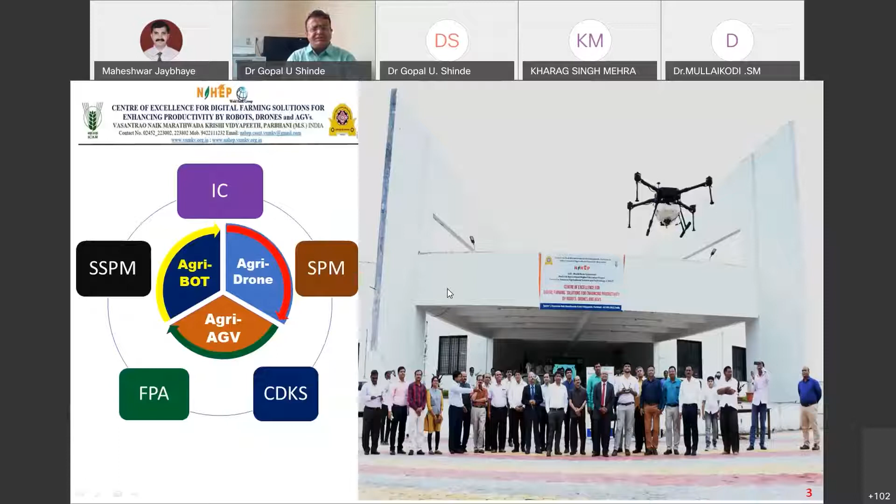So postgraduate students will develop new experiments with new solutions. This university holds land around 7,000 acres in Parbhani campus, and with the rest of the districts, the total entire campus becomes around 10,000 acres. So using these resources, we can go for making these practices within the center.

This center is called the DFSRDA Center. This DFSRDA Center holds this entire organizational structure where human resources are paying their services and doing activities to innovate new practices for digital farming solutions.

The traditional practices, earlier we used to go for animal power and before that manual labor. All those operations took too much time. Before the 19th century, these practices were very time consuming, and energy conservation was depending totally on human efforts and human energies.

But later, after the 19th century, from 1914 to around 2014, this developed phase was introducing different types of mechanical devices, and mechanization started there onwards. So the people and society who are working with these advanced technologies now are very much acquainted, and they are working with different devices as such.

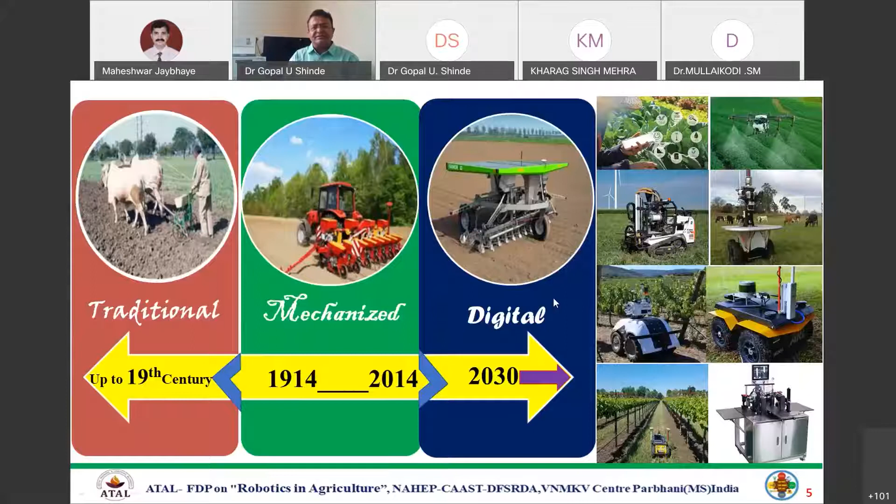Whatever we see, we must go to the new era or new venture, and that is agriculture with advanced technology. So agri-bot, agri-drones, agri-AGVs, these are the targeted devices. We know agriculture devices are basically robots working for agricultural purposes, to find comfort for the farmers and the exact cropping system and production cycle.

So we do the sowing. Before this, we do soil bed preparation, soil crop mapping, then sowing, interculture operation, then harvesting operation. Moreover, after harvesting, we go for post-harvesting operation, food production, and post-harvest production with good qualitative value-added products in food culture.

So these are the emerging applications, and we need to find the difficulty areas that attract operational time and operational effort for the farmers. So planting the seed, harvesting, or going with the environment and putting various kinds of data in the hands of the robot by mobile device.

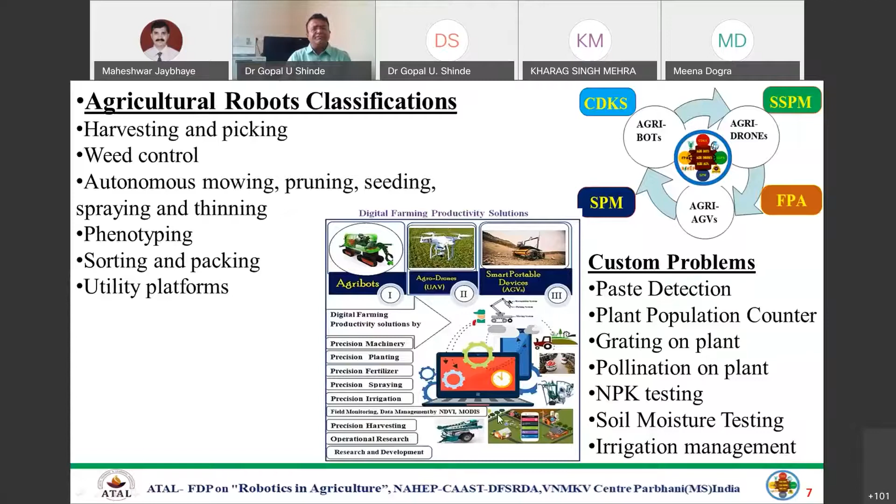So that's why I started practicing around 1999. At that time we were habituated to just attractively see how a robot looks like. So we started producing agricultural robots using scrap material, with toy-like operations that are nowadays available in the new toy market, like forward application, reverse application, left turn, right turn, up and down.

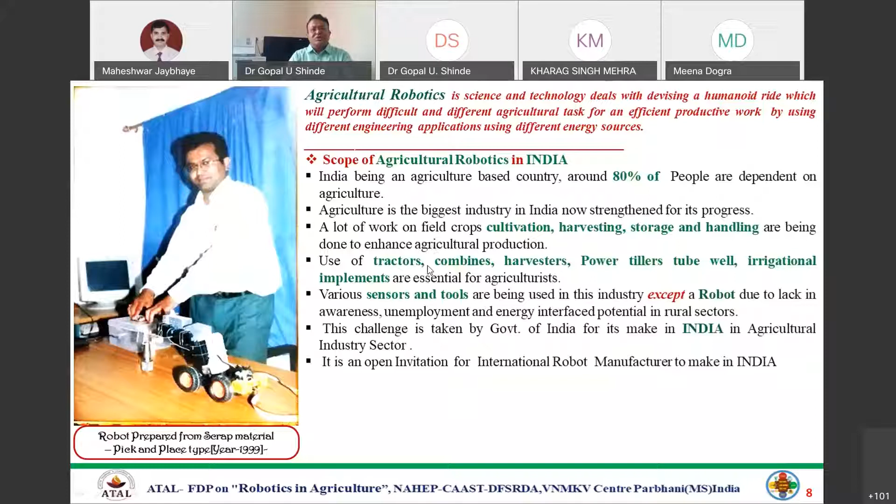These are the kinds of motions we are making by use of motors, joints, and the end effector, which performs operations using multi-degree of freedom. So different types of small automated devices and robotic applications were an attraction in the last decade, and now we started doing this for the Indian farming system, for Indian farming society, to attract it toward this new field.

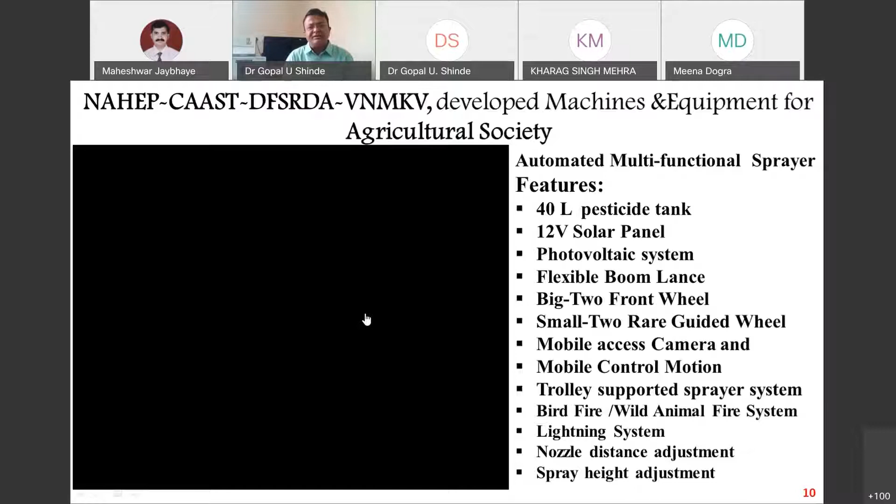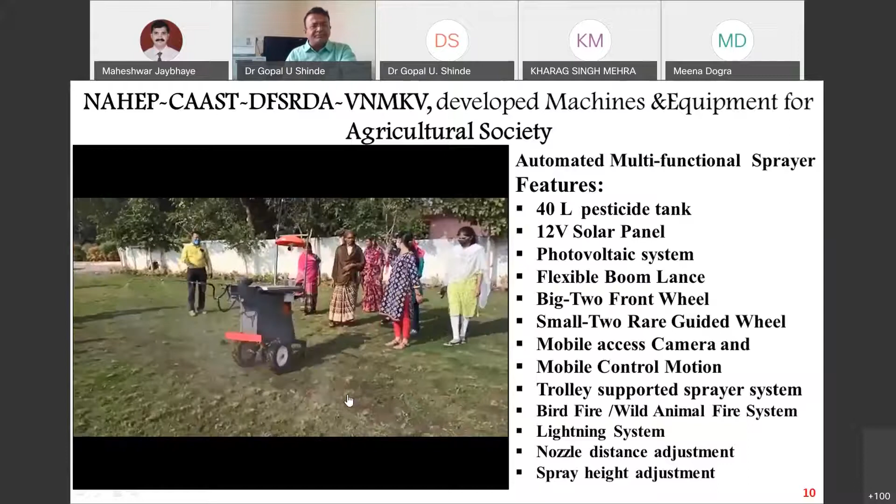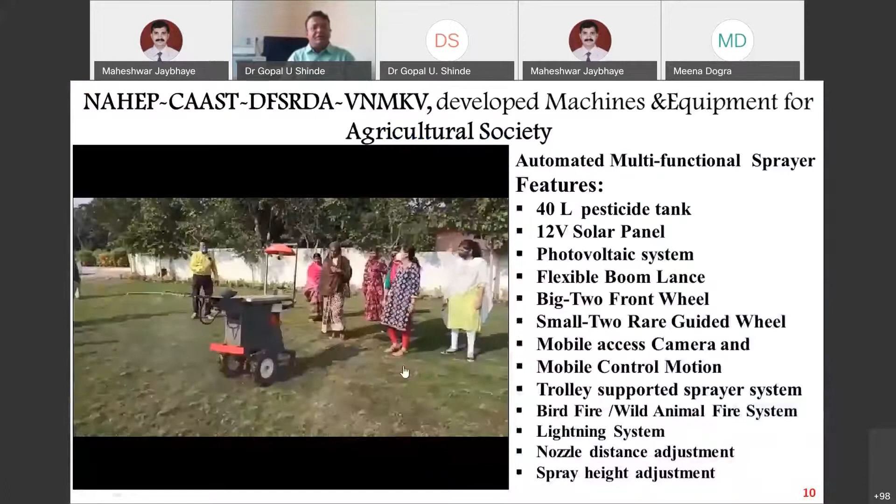We found one of the devices - we have developed many more devices - and I can show some of them on this platform. This operates on a self-activated program for a vegetable sprayer system, where a woman laborer or woman farmer can also operate it for different cropping systems.

Once you locate the GPS in the field, this sprayer has a 40-liter capacity pesticide tank, a 12-volt solar panel, and we are also using a battery for storage. The battery can operate for at least 1 hour.

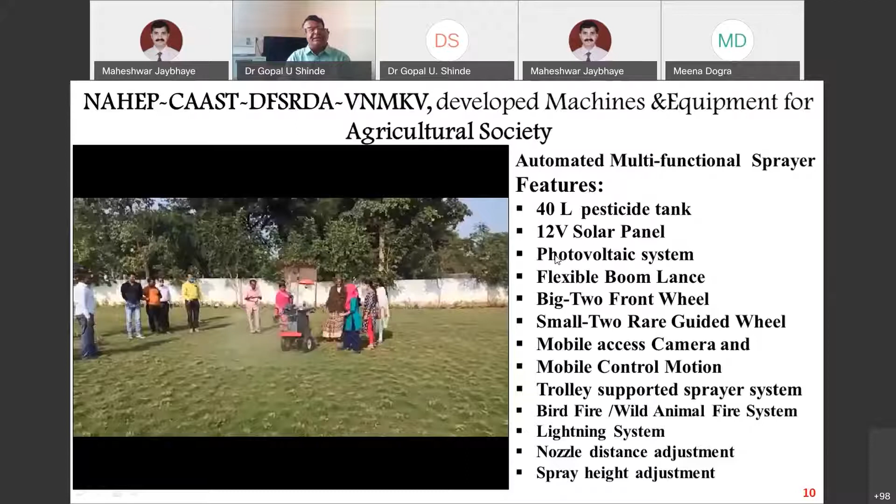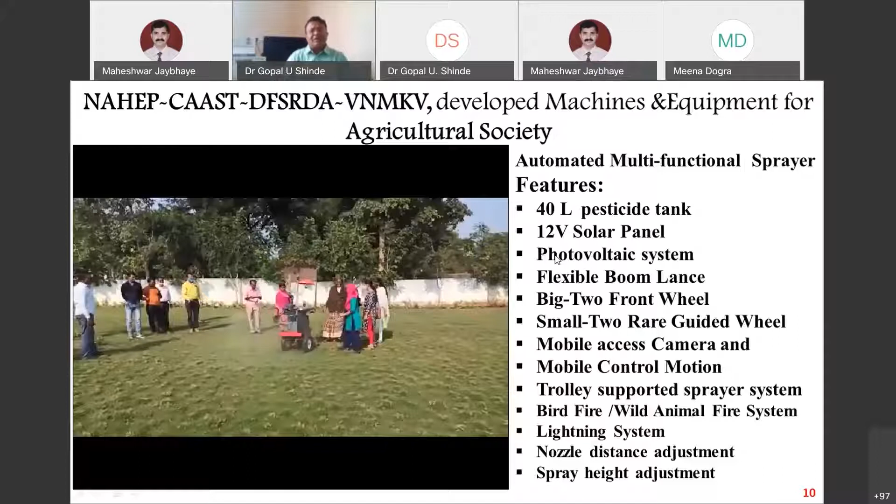We have a version with a flexible boom lance. The lance is nothing but a straight bar, or we can make it foldable. There are different types of nozzles we are mounting, and these nozzles can be adjusted at different distances so that in the row crop system, they suit a particular row crop by adjusting these nozzles.

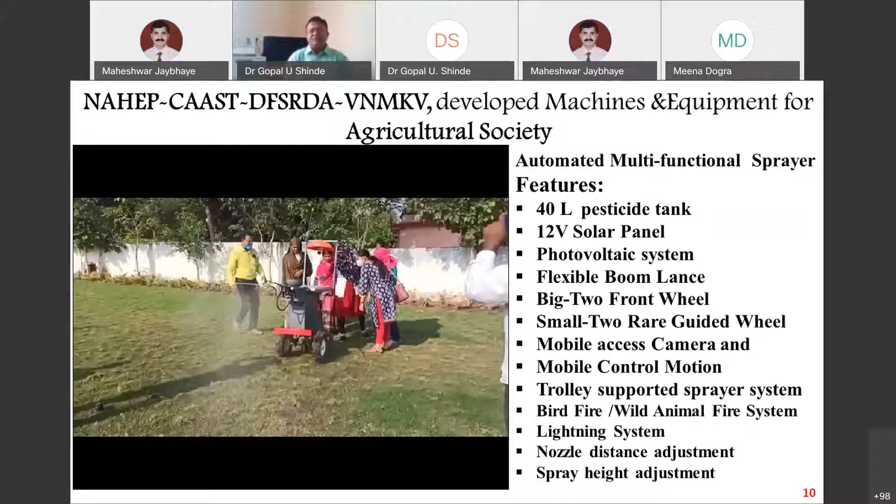It has big front wheels and small rear guiding wheels. We are using mobile access camera, and we can also control the motion on mobile. Earlier the operator used to carry it manually and certainly got fatigued after a few minutes of operation. So this comfort is now independently handled by the sprayer system.

This device creates a loud voice, and this loud voice scares the birds away - birds are not able to stay in the field because of it. There's also an electronic fire device. Electronic fire is also used in the field to prevent destruction of the crop at its early stage. Sometimes one needs to operate this device at night, in the evenings, using solar-charged batteries.

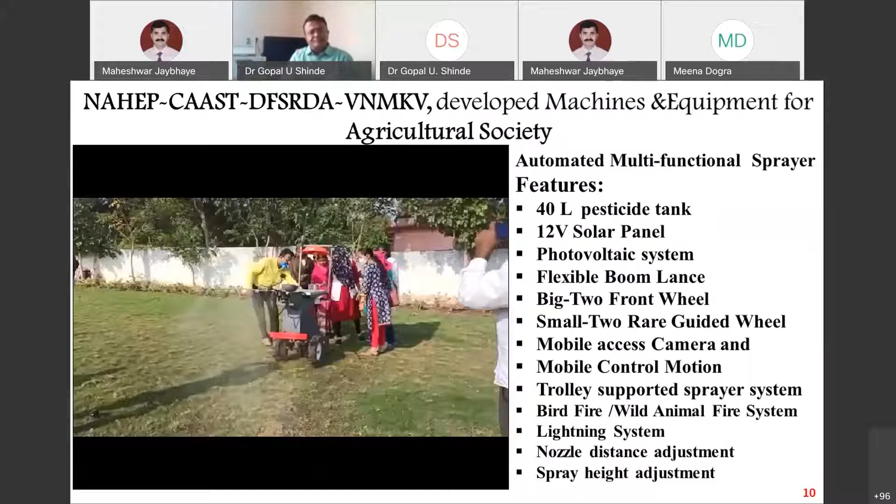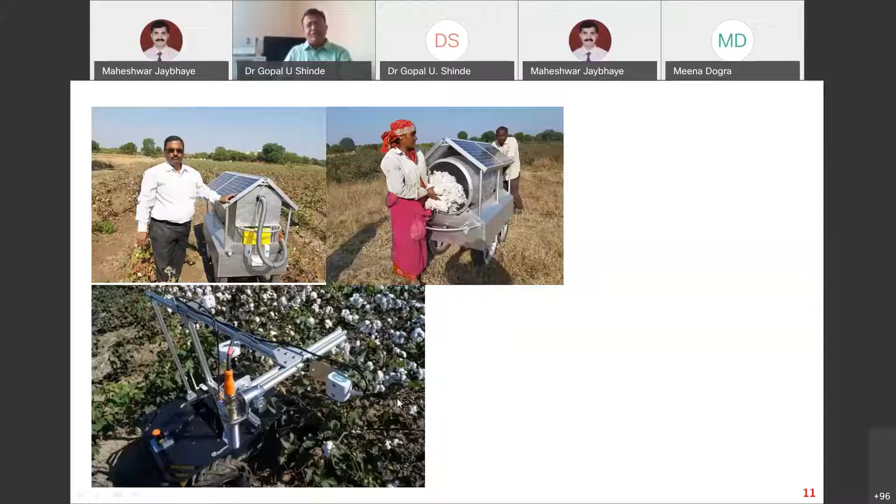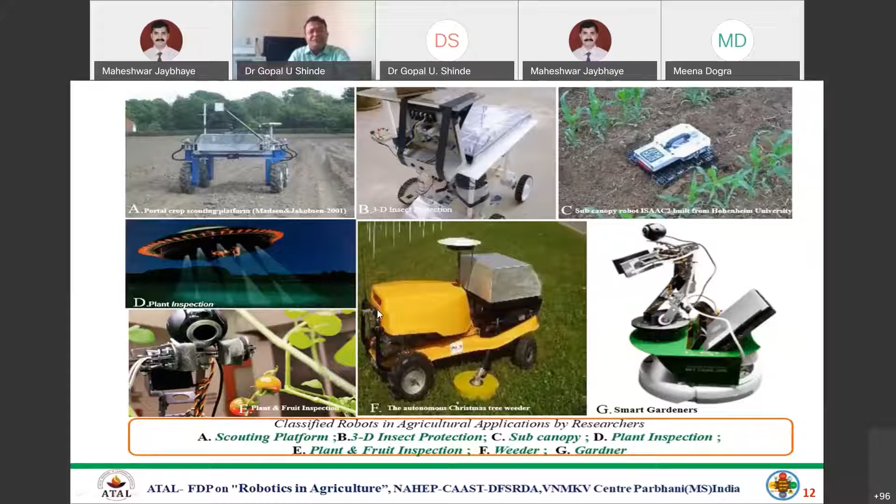There are different types of robot models in our plant. Sometimes it uses solar energy, voltaic energy. In the agriculture field, we like to make a sustainable device which can work on solar power.

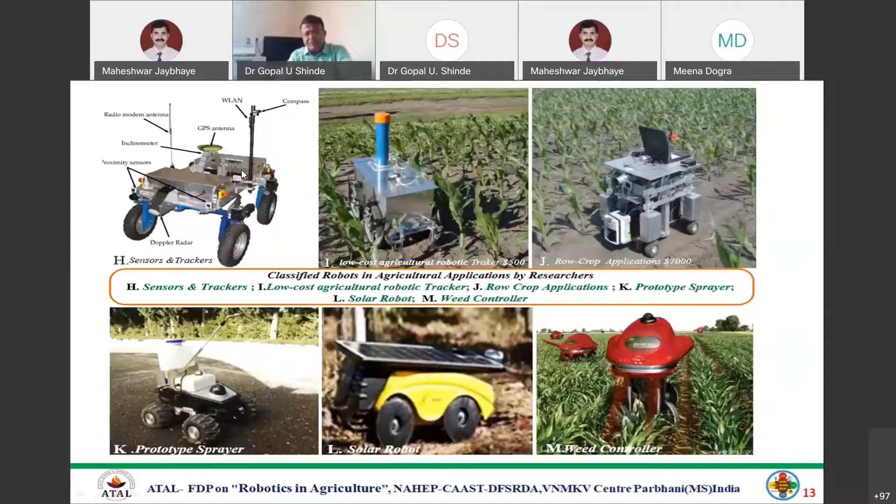So sensor applications using devices with physical contact or non-physical contact - we are also procuring different types of cameras. So now we are tying up our NAHEP center with Boston Dynamics. Boston Dynamics makes animal-like robots which can go and roam around the field to scout and gather information.

We are also associating with Ubiquiti. They've started working with us, and we have built up an MOA with them for doing certain custom application robots for indigenous cropping systems.

The various types of robots now take on the challenge of working below the soil surface. But if you look up to 30 centimeters into the soil, there is a lot of soil strata which we cannot see with naked eyes. When we apply the tool to interface with this below-soil surface, the force is indefinite, unpredictable. So for that unpredictable force, we need cultivators and rotavators which can go inside the soil surface and work for different kinds of soil bed preparation operations.

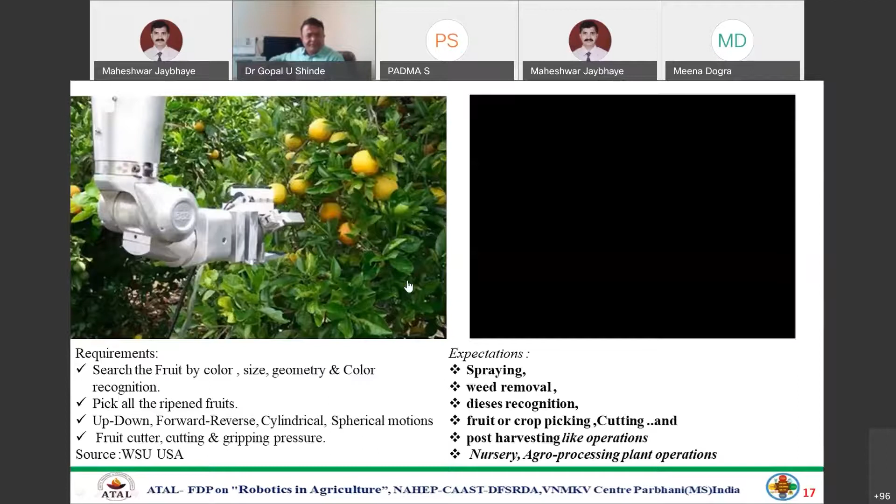Relating to plant counters and plant specifications, there are robots developed by different countries. I visited Spain for winery production - horticulture plants. They developed a robot for counting the vine plants, which is very important for them as a cash crop.

So for this, the types of systems can be built in. We will find that sometimes we need to apply herbicide, sometimes we need different kinds of soil tillage techniques, or different operations to cultivate these plant systems through their entire production cycle.

Regarding the winery in Spain, Universidad Politecnica de Valencia has developed this winery robot. They designed and started experimenting, and successfully brought this kind of product to the market.

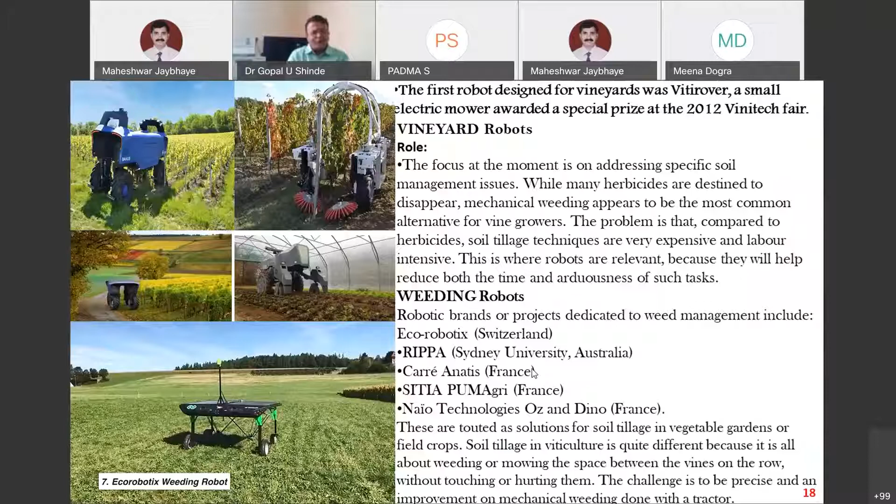You can see the robots developed for huge production autonomous systems for the farmer. For the weeding operation, the robot goes to the plant and identifies the weed exactly at that location. It determines the location as a nucleus target, where the spray is quantified very optimally.

So the spray waste for such a huge plantation program is economically valuable, and looking at the total operation cost, the cost of the spray is very important. There are 6 types of models, and I visited there - these 6 models are developed and practiced.

I have seen so many areas and different types of robots available nowadays for particular operations, which can be adjusted and thought of as easily useful for indigenous cropping systems. These are the addresses which I can share with you.

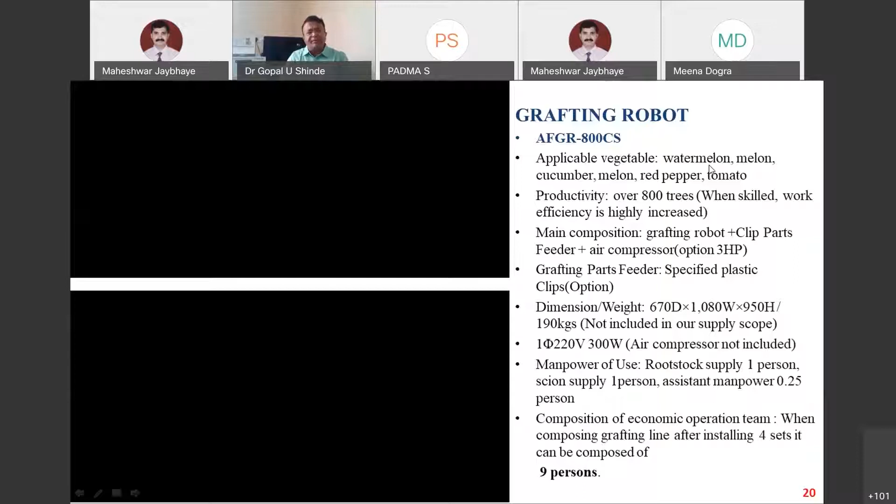I will just show you these two videos. You will be able to see the kind of applications now possible with the help of the grafting robot. These are used for two different plants of the same species, two similar kinds of genetics, root stock and stem, meaning half of one plant and half of another. They are cut at a particular point and then clubbed together to obtain a single plant, using clipping.

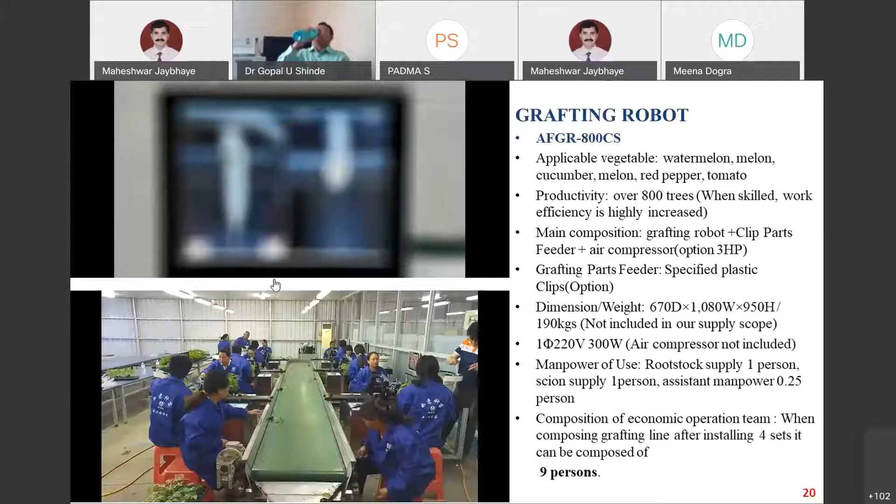So this was the video of making these two plants graft. There is a setup, and this setup is made for different types of innovative practices in the field. This is trying to develop seedlings first. Seedlings are developed on the farm to operate and be able to develop a plant of two species joined together, making this available for farmers who are interested in developing new types of plants.

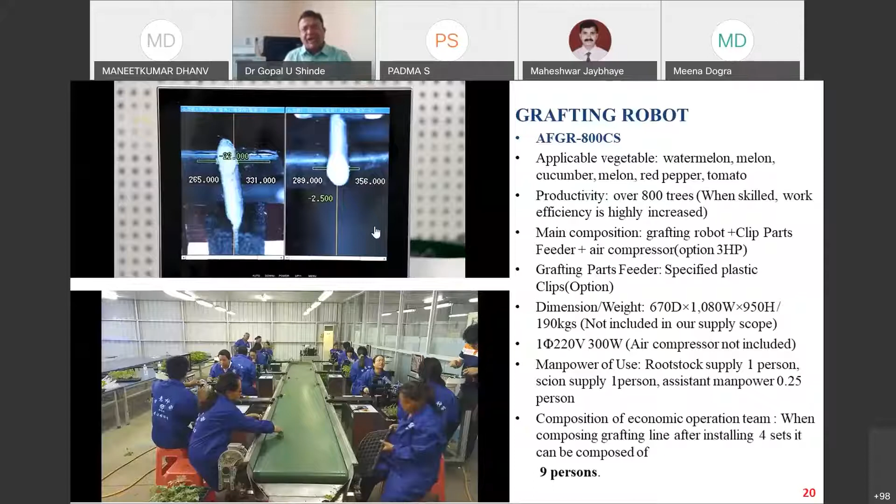And this will have tomato on one branch and chili on another branch, like that. The productivity of this robot is such that it can produce 6 to 800 plants per hour. So looking at an 8-hour shift, production of 5,000 plants per day.

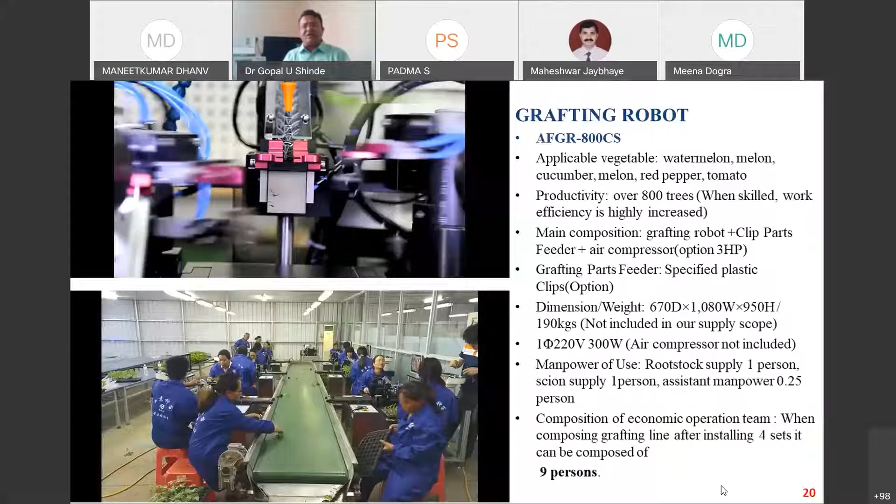The productivity will be high when the team is working. There are 9 persons required to operate this, and if the 9 persons are working for an 8-hour shift, there will definitely be 5 to 6,000 plants produced from this kind of setup.

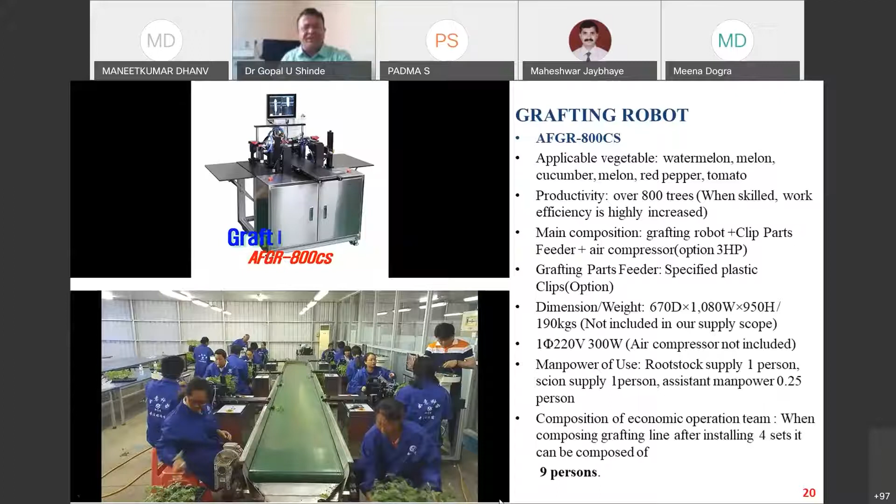So the setup can be further extended. These are the machinery we have just received that will soon be installed. We can have two different plants joined together in the same plant. So this can be one good adventure, a good new way for the digital farmers who are interested to work in this field.

Another thing, we are going to Belarus. Belarus is one of the countries where the agricultural production systems are producing with very high technological interventions in their field practices.

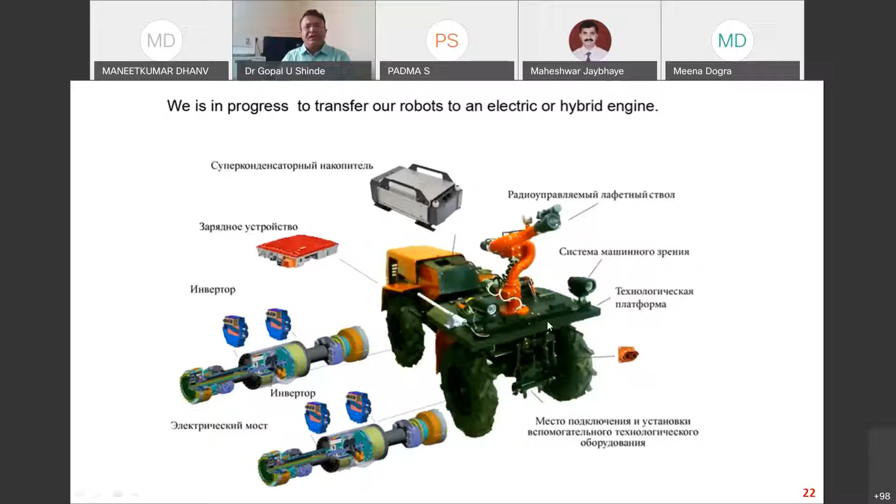They have developed a robot on a small tractor, where the robot can do operations like spraying and scouting in the field. The kinds of applications I have seen, particularly at the exhibition, showed they are changing their way towards agriculture, and big agricultural forces are created with different high digital technological capabilities.

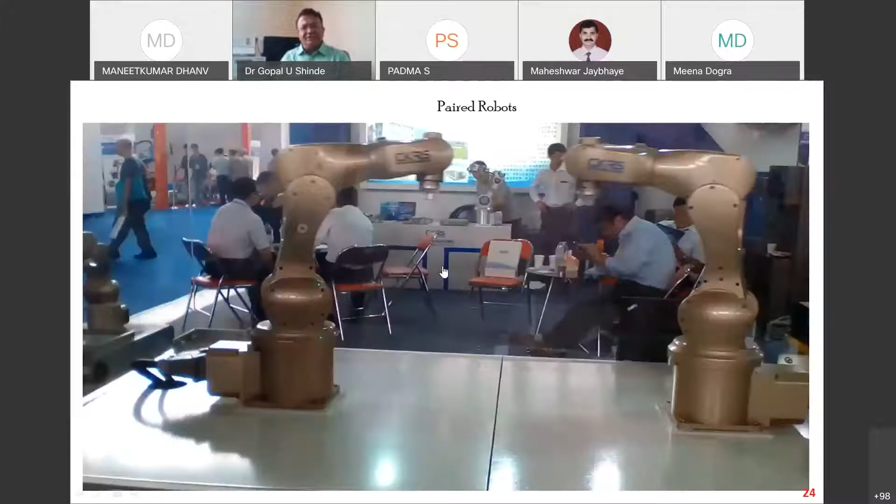So I found the way robots and robotic systems need to be studied by engineers who are real aspirants to study different kinds of manual operations as well as different kinds of systems. Nowadays small practitioners are developing small smart tools, sometimes with some kind of jugaad, to make the application run and be comfortable for farmers.

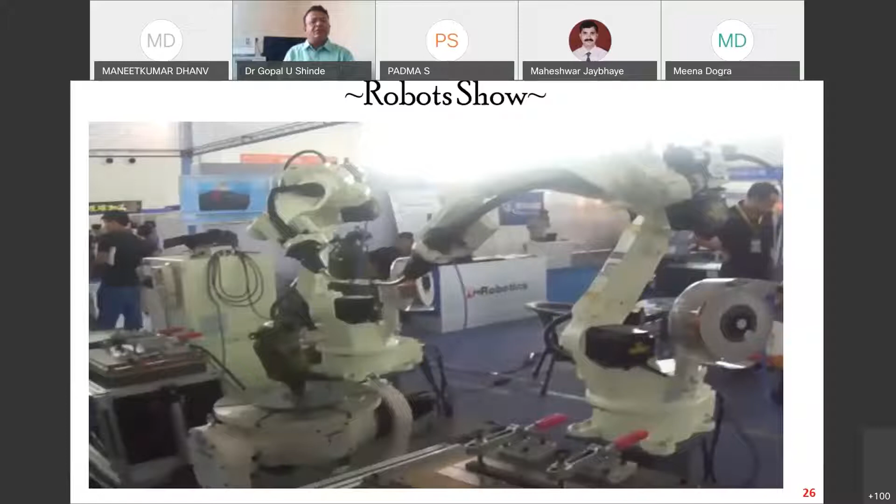I feel that this challenge, when I discussed it with the Robotics Association's president, Dr. Francisco Rovira, he mentioned he would really like to work with the Asia Pacific region, and he selected me as one of the Asia Pacific Board of Director members for his association in CIGR.

So this is what I feel, looking at the statistics, looking at the market, looking at the present scenario, looking at our challenges, the engineering work will make the agriculture and agricultural aspirants feel comfortable because of our engineering society. We feel that crops, at least major crops like soybean, rice, and different kinds of pulses, then cotton, sugarcane, different kinds of oil seeds, peach and pea, or different types of fruits like apple, orange, lemon, and vegetables, the different types of spicy crops - these are all our production systems, traditionally done, which can be made modern through the use of automated technology, and that automated technology is very much essential to develop.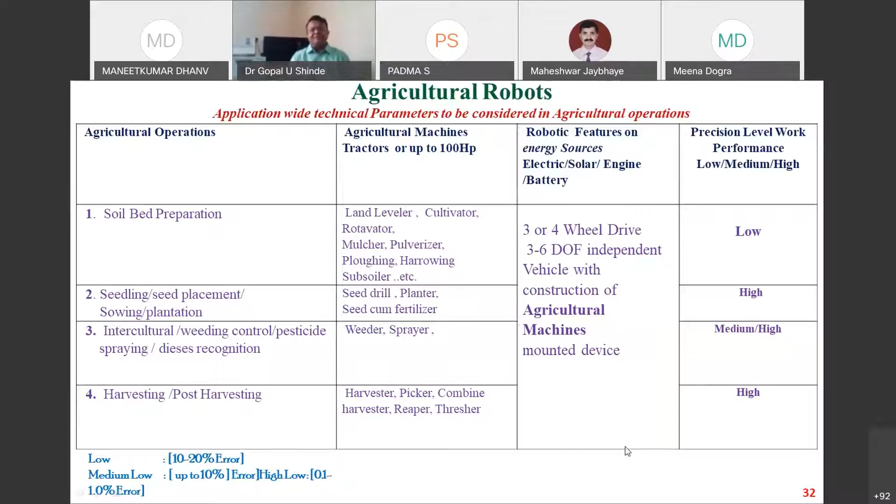We will go ahead with some of these problems in the future and take them forward as new areas of opportunity for society to develop. So the demand is for greenhouse smart robots - smart robots are required for greenhouses.

They are also required for dairy farming processing. We have one more lab, the CAD/CAM lab, along with ANSYS software. We also have GIS software and many more agricultural climate evaluation and monitoring software for mapping.

For disease recognition and detection, we are developing sensors. For intercultural operations, we are developing weeders and different types of spraying systems. Robots have different kinds of requirements up to harvest time - these are essential things, and robots will keep developing in different phases.